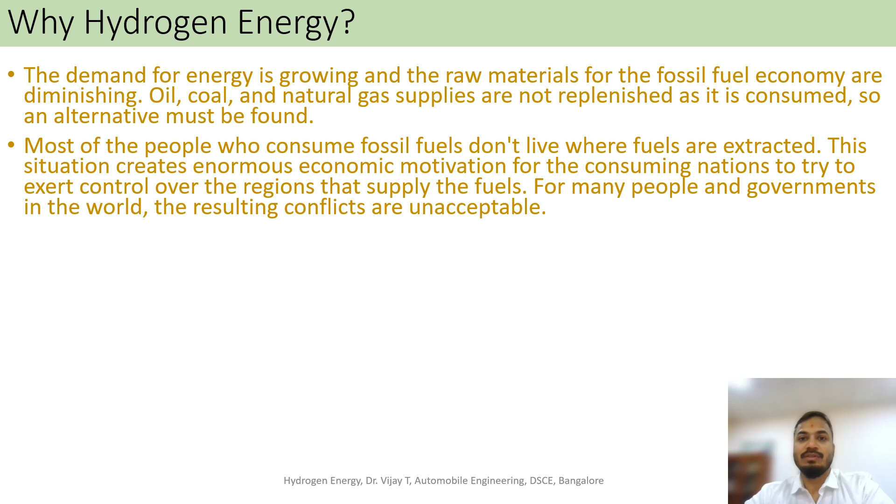Most of the countries that consume these fossil fuels are not very near to the place where it is being produced. So transportation of these fossil fuels to the place of consumption leads to greater ill effects with respect to emissions, transportation, inventory, wages and other things. No country wants to be under the guidance of any other country with respect to the energy sector; everyone wants to be self-sustainable with respect to their energy scenario.

Emissions from fossil fuel are significant and contribute greatly to pollution in the atmosphere, leading to climate change, depletion of the ozone layer, depletion of ice caps, rise in sea level, pollution of water, underground water seepage, improper storage of underground water, and deforestation. All these aspects are contributing in one way or another to our day-to-day lifestyles.

So for many people and governments in the world, the resulting health and climate impacts are unacceptable at the present scenario. Third world economies, especially developing countries, are very much dependent on developed countries for energy with respect to fossil fuel. The major developed countries are playing a monopoly today with respect to supply of these fossil fuel energies to the countries which are quoted as developing.

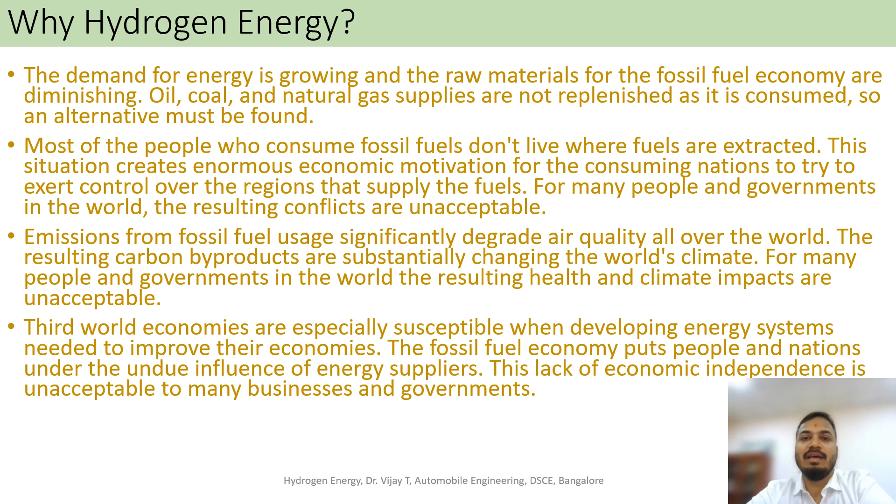Lack of economic independence is unacceptable to many businesses and governments. Every country, or as an individual, wants to be independent and self-sustainable. In the same way, a country also has to be independent and self-sustainable with respect to its energy sector, because the energy sector plays a major role with respect to our GDP, our economy, and it also helps in the manufacturing sector and day-to-day activities. Energy is a basic requirement today for a human being.

Most countries have met each other during the COP26 meeting and the Paris Agreement, and India is not way behind. We are in the forefront with respect to signing of this agreement, and our Prime Minister Sri Narendra Modi has given some outputs or outcomes that we are going to reach in the next 5 to 7 years, with a larger reach with respect to climate change and energy scenarios. So this is what he said.

In the midst of this global brainstorming on climate change, on behalf of India, I would like to present five nectar elements, which he called Panchamrit, to deal with this challenge of climate change or reduction of emissions or reduction of carbon in the atmosphere.

First, India will take its non-fossil energy capacity to 500 gigawatts by 2030. That is renewable energy production in India by 2030. Now it is 2024, so in the next 6 to 7 years, we will be reaching 500 gigawatts of energy capacity.

India will meet 50% of its energy requirement from renewable energy by 2030. A great statement. India will reduce the total projected carbon emission by 1 billion tons from now till 2030. This is an amazing outcome dreamt by our Prime Minister. By 2030, India will reduce the carbon intensity of its economy by more than 45%.

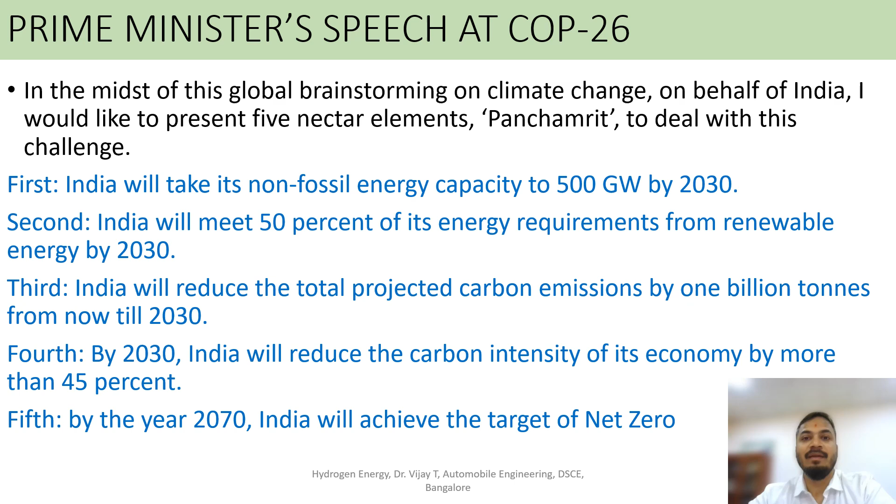By the year 2070, India will achieve the target of net zero with respect to carbon emissions. So it means by 2070, the whole of India's energy production will be with respect to renewable energy alone.

So where do we stand today with respect to renewable energy? India stands fourth globally for total renewable power capacity additions. We are fourth in wind power capacity, fifth in solar power capacity, both globally. And India assumed the presidency of the 13th Assembly of the International Renewable Energy Agency, so today we are president of IRENA.

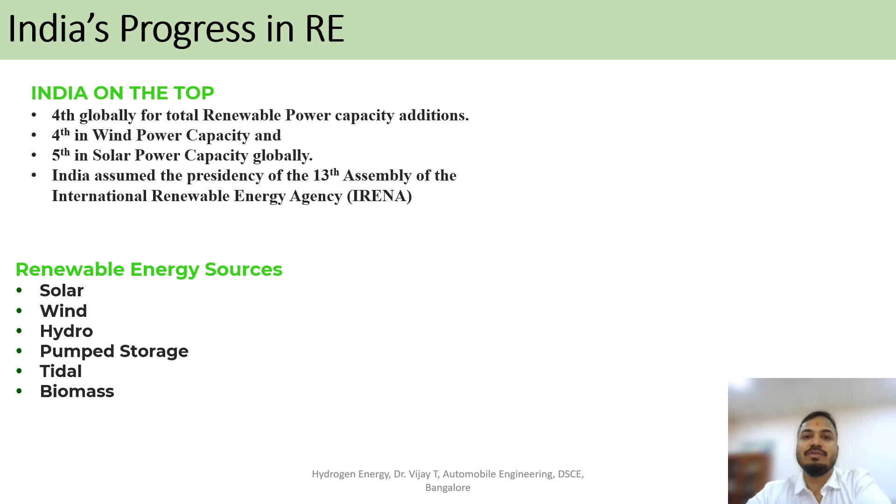So the different sources of renewable energy through which power is generated today in India are solar, wind, hydro, pumped storage, tidal, and biomass. So this is what we are today.

Many scientists and researchers are trying to convert this waste to energy. Today we have only 0.58% of the total energy generated, or 0.58 gigawatts, from waste to energy. This percentage is going to increase in the near future. Biomass is also a major focus and is categorized under the category of renewable energy.

When we talk of hydrogen, there are different types being produced today, among which green hydrogen is of prime importance to us. So why green hydrogen? The production of hydrogen with respect to the utilization of renewable energy sources is classified as green hydrogen, in simple terms.

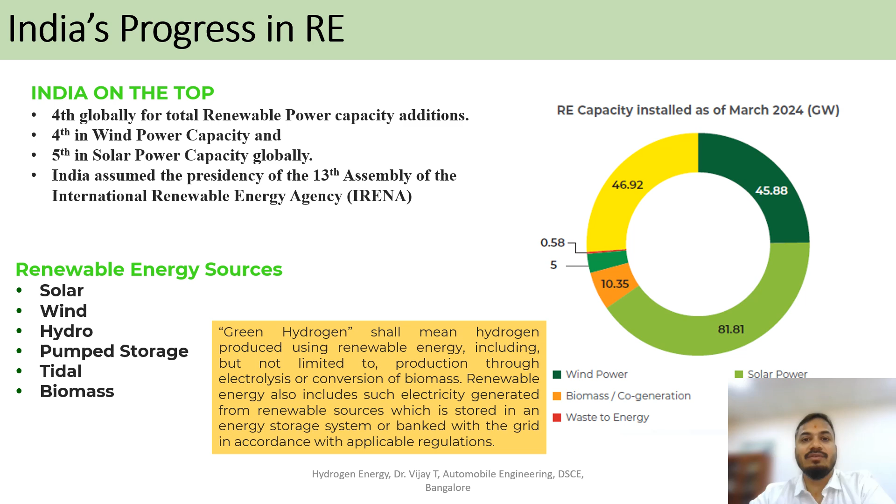So any form of renewable energy, in stored or direct form, if utilized by any process for generation of hydrogen, is classified as green hydrogen. Among the different types of hydrogen, green hydrogen is of major focus to India today. It has been realized that hydrogen will act as a critical enabler to achieve the global targets to limit the increase in temperature to 1.5 degree Celsius.

Right from the industrial revolution, we know that the temperature is increasing drastically, and this is the maximum limit that the world has agreed that we can leave the climate increase to a maximum of 1.5 degrees. If we go above it, there are drastic changes that are going to happen in the whole world.

Planet Earth will not be in a state where human beings, animals, or trees can suffice. So 1.5 degrees Celsius is the maximum range we can give for the increment. But we should not reach 1.5.

We have to come down in curve with respect to this, and try to maintain the temperature with respect to the feasible limit for having a peaceful life on this planet.

So why hydrogen energy now? Decarbonization targets - hydrogen could be a viable fuel with huge potential to achieve global decarbonization targets. Every country today has a target for reduction with respect to the carbon emissions that they are producing.

Whether it's with respect to the manufacturing sector, procurement of raw materials, or transportation - any sector you take, the emission of carbon has to be reduced drastically. This is a complementary solution to renewable energy.

Hydrogen energy production will be an added advantage by utilization of renewable energy, which is clean and green, supporting grid load management via storage solutions. So the energy directly generated via grid, if it is not required to be used at the current moment,

then it can be used for storage. So green hydrogen based energy storage systems are going to be very much helpful.

Similarly, decarbonization of hard to abate sectors, technological advancement and falling technological costs. If we look at the production of hydrogen a decade back, it was way more expensive.

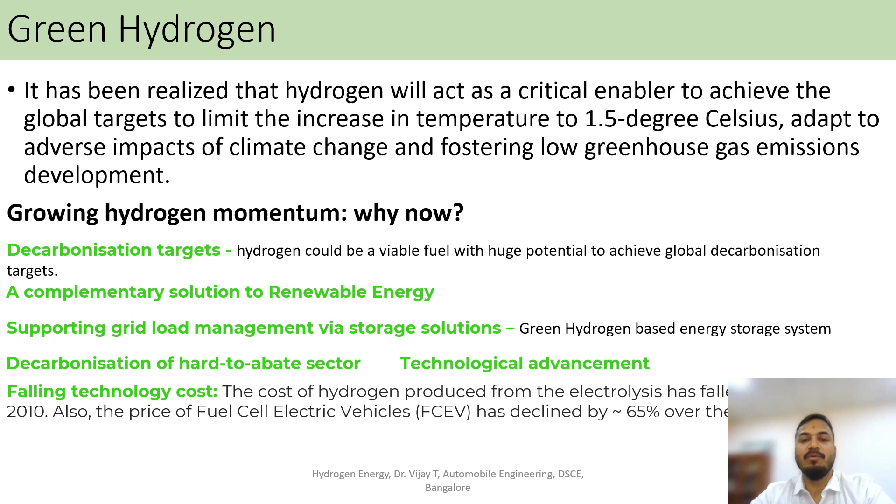Now it has been reduced drastically. So wide implementation of hydrogen energy with respect to various sectors and mass agreement will drastically bring down the cost.

So why is India betting big on hydrogen energy security? We all know what happened during the pandemic, and India is highly dependent with respect to the import of various fossil fuels from different countries across the globe.

So the supply chain during the pandemic affected very badly most of the countries that were dependent on other countries. So India wants to be self-sustainable.

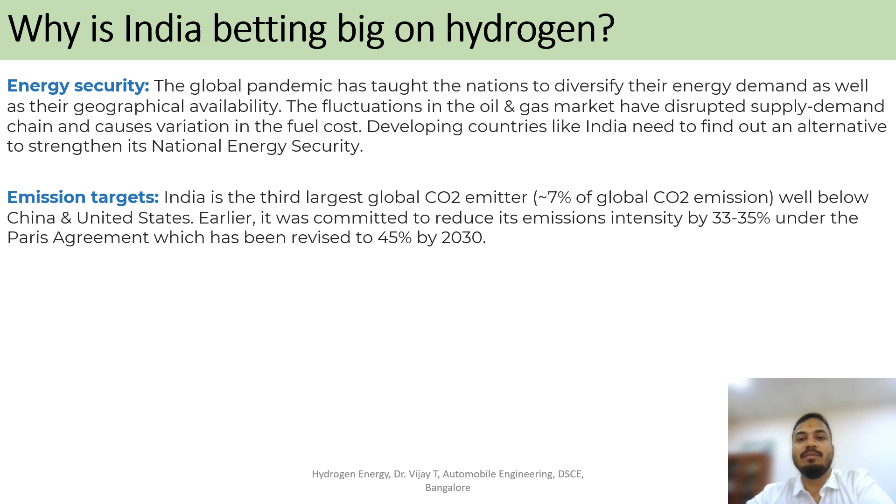For this to happen, we should be in a stage of developing our own energies, which will be sufficient to run all our sectors to its fullest. So hydrogen is going to play a very major role with respect to this.

Emission targets is another thing - if we look at the global CO2 emitters, India stands in the third position, where first position is held by China and second by the United States.

India had committed to reduce its emission intensity by 33 to 35%, but in the new Paris Agreement, it has been revised to 45% by 2030.

So to reach this competitive target, we have to go for hydrogen energy, which will be playing a major role with respect to carbon reduction in carbon emissions.

Economic dependencies and balance of trade - India is highly dependent with respect to import of oil from various countries, and we need to reduce this.

The oil import bill for financial year 2020 and financial year 2019 was approximately 101.4 billion US dollars and 111.9 billion US dollars, which is really a huge amount.

So if this amount is invested back in India, it is going to be a major breakthrough for all the developments that we have today and in the near future.

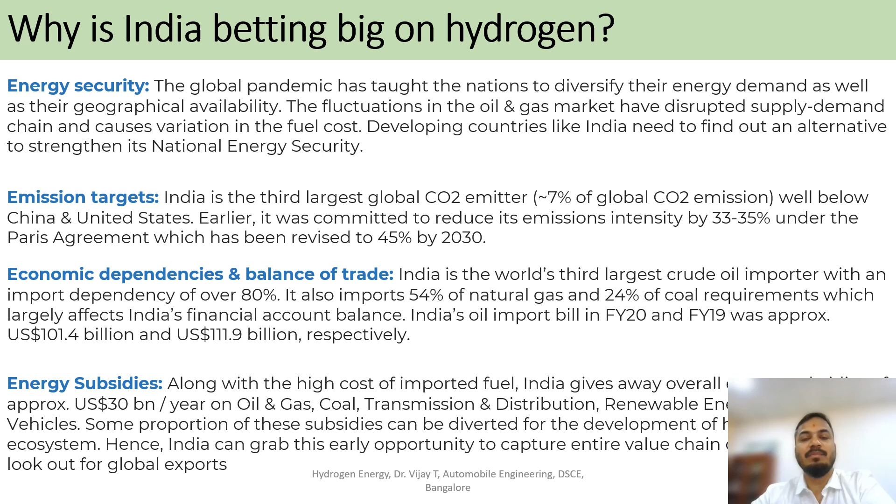So energy subsidies, along with the higher cost of import - India gives subsidies to its energy sectors for different categories of industries that use these energies. This is also a burden on the government, which will be reduced with respect to hydrogen energy.

As we discussed only about hydrogen energy, here is a glimpse of green hydrogen and different forms of hydrogen that are available today. The first one is black brown hydrogen, which is produced by coal.

Gray hydrogen, which is produced by natural gas. Blue hydrogen is produced by fossil fuel. Turquoise hydrogen is produced by methane.

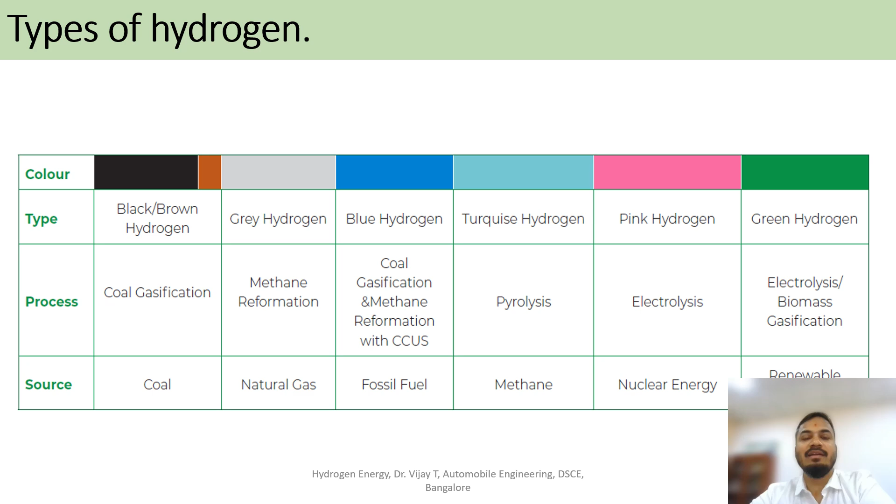Pink hydrogen is produced by nuclear energy, and green hydrogen is produced by renewable energy. So renewable energy and green, clean energy is what we are targeting, and this is where green hydrogen falls in the category.

Global hydrogen production has various methods. Water electrolysis is only 4%. Natural gas steam methane reforming, also known as SMR, is 48%. Oil reforming is 30%, and coal gasification is 18%. So these are the different methods through which hydrogen can be produced.

When we look at certain specific engineering terms or physical and chemical properties of hydrogen, this is where we stand compared to gasoline. The specific energy of hydrogen is between 120 to 140 megajoules per kg, while that of diesel and gasoline fuel is between 30 to 45 megajoules per kg. So the specific energy of hydrogen is almost 4x higher than gasoline and diesel fuel, which will play a major role in utilizing hydrogen as fuel in internal combustion engines.

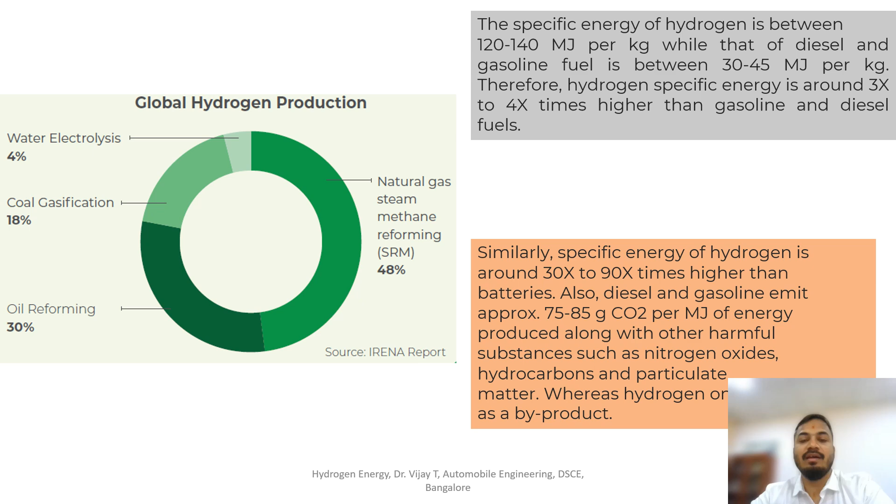The specific energy of hydrogen is around 30x to 90x higher than that of batteries, and EV is slowly taking the larger chunk of the market today. So if hydrogen becomes completely evolved and mature, batteries will lag behind and leave space for hydrogen energy to take the larger space with respect to the transportation sector.

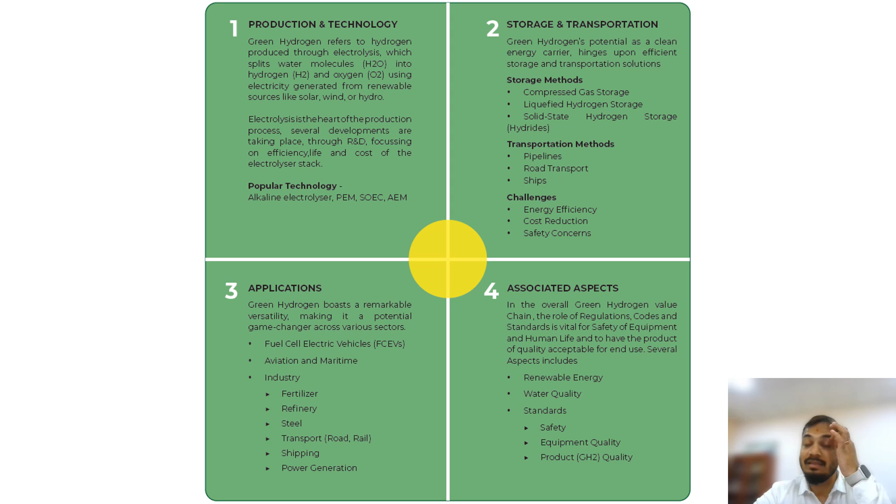This is how green hydrogen is produced, stored, applied, and its different areas of association. It is produced by different methods like electrolysis, SMR, coal gasification, or oil reforming. Once produced, it has to be stored or transported. Storage methods are compressed gas storage, liquefied hydrogen storage, and solid state hydrogen storage. Transportation from one place to another can be through pipeline, road transport, or ships. The challenges are energy efficiency, cost involved in production or transportation, and safety concerns.

Where do we apply this hydrogen energy? The major application is FCEV, fuel cell electric vehicles, then aviation and maritime, and different industries like fertilizer, refinery, steel, transport, shipping, and power generation. The associated aspect of green hydrogen is that regulation, codes and standards play a vital role for safety of equipment and human life, and to ensure product quality acceptable for end use. Several aspects include renewable energy, water quality, and different standards with respect to green hydrogen.

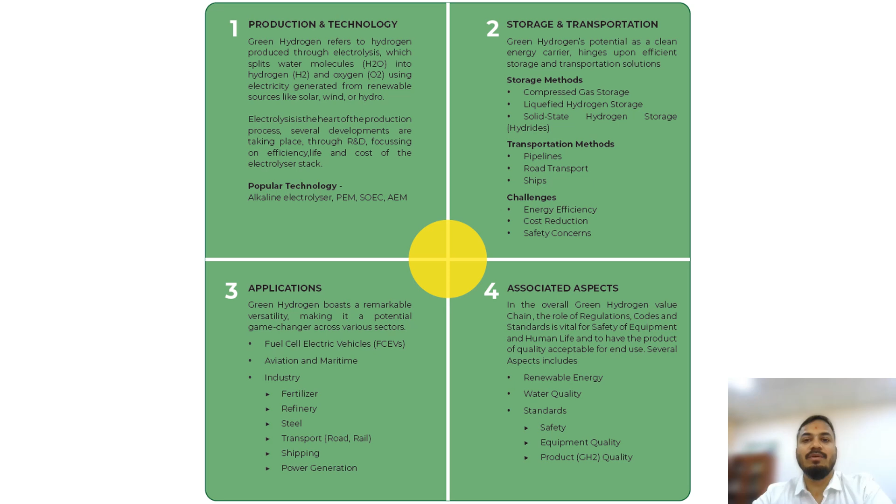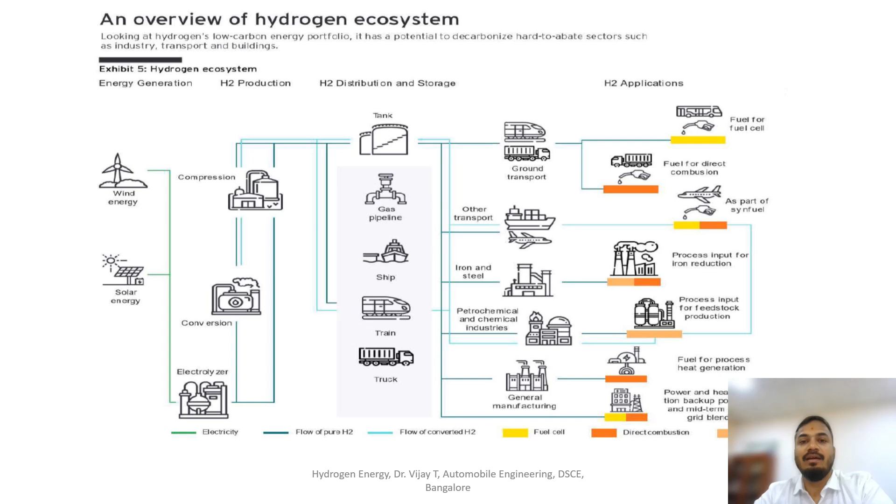So this is a brief review of what hydrogen is, where India stands with respect to renewable energy, and what our focus is with respect to production of hydrogen in the near future, and the goals India has kept for itself with respect to reduction in carbon emissions and reaching the target of renewable energies. Thank you, it's a wrap for the introduction.